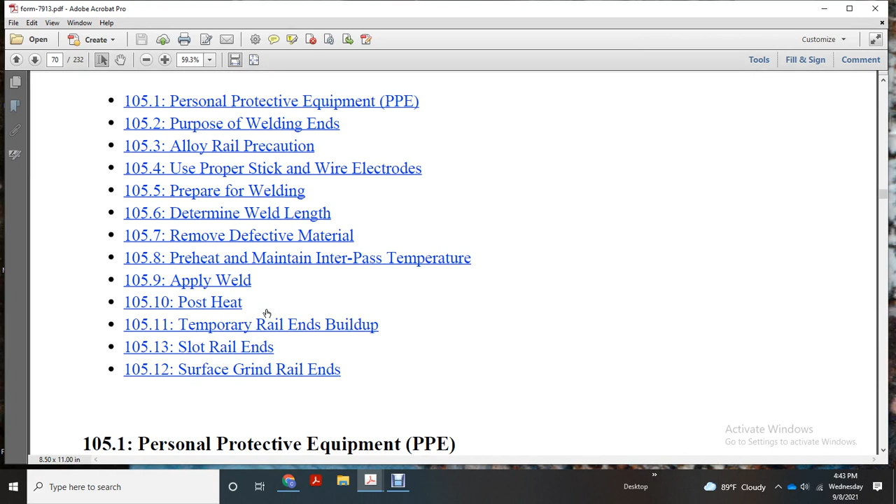105. Welding rail ends. Personal protective equipment. Purpose of welding rail ends. Alloy rail precaution. Use the proper stick and wire electrodes. Prepare for welding. Determining weld length. Remove the defective material. Preheat. Maintain interpass temperature. Apply weld post heat treatment. Temporary rail end build-ups. Slot rail ends and surface grinding.

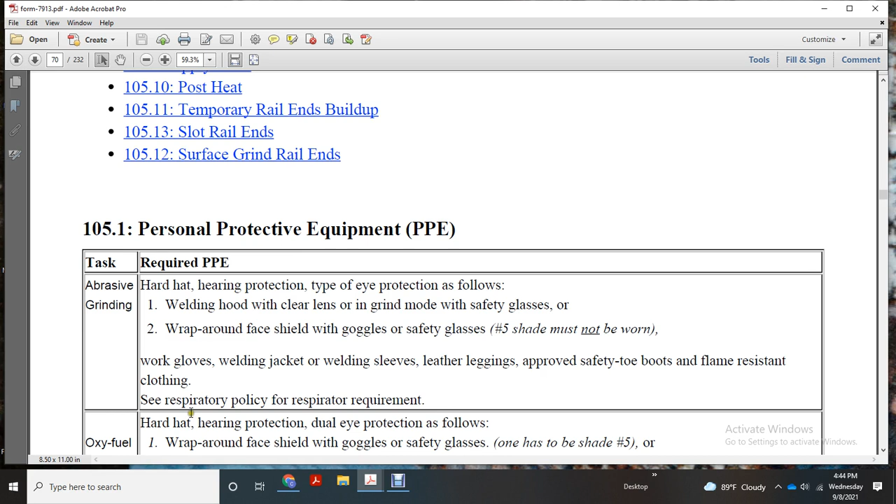approved safety-toe boots, flame resistant clothing, see respiratory policy for respiratory equipment. For oxy-fuel gas: hard hat, hearing protection, dual eye protection, wrap-around face shield with goggles and safety glasses, mono goggles shade 5; safety glasses can be used as an alternative; leather welding gloves, welding jacket, weld sleeves, leather leggings, approved safety boots, and flame resistant clothing.

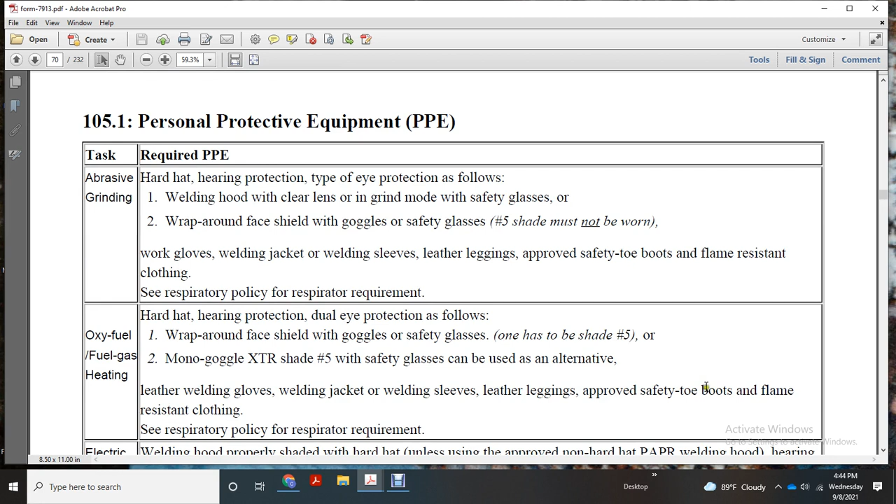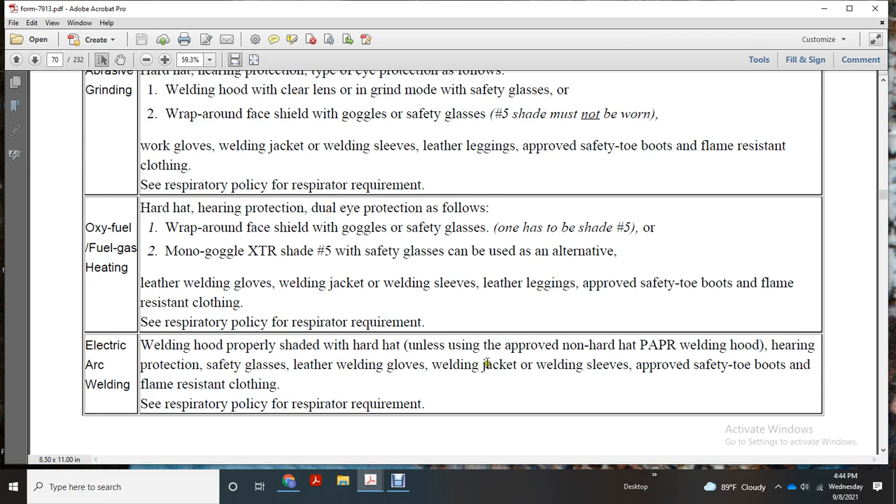See respiratory policy for respirator requirements. Electric arc welding: welding hood properly worn with a hard hat, unless an approved non-hard-hat PAPR weld hood is used, hearing protection, safety glasses, leather welding gloves, welding jacket, welding sleeves, approved safety-toe boots, flame-resistant clothing, see respiratory equipment.

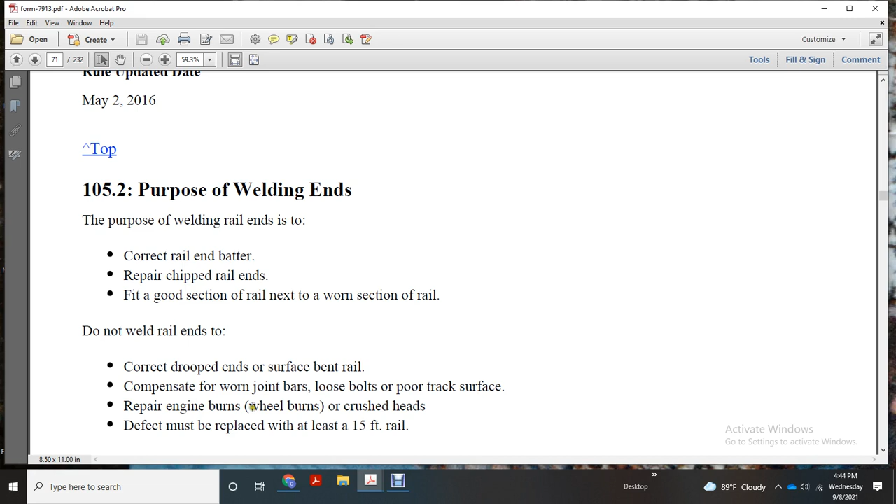Purpose of welding rail ends. The purpose of welding rail ends is to correct rail end batter and repair chipped rail when there is a good section of rail next to the worn section of rail. Do not weld rail ends to correct drooped ends or surface bent rail, worn joint bars, loose bolts, or poor track surface. Repair engine burns, wheel burns, crushed heads. Defects must be replaced with at least 15 feet of rail.

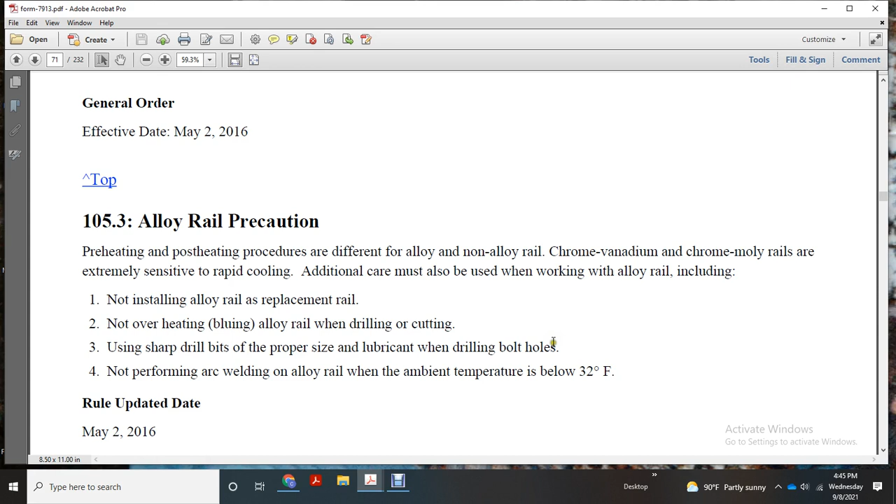Do not weld the gauge face of the rail. Alloy rail precaution: preheating and post-heating procedures differ for alloy and non-alloy rail. Chrome-vanadium and chrome-moly rails are extremely sensitive to rapid cooling. Additional care must be used when working with alloy rail, including not installing alloy rail as a replacement rail, not overheating or bluing the alloy rail when drilling and cutting, using sharp drill bits with proper lubrication when drilling bolt holes, and not performing arc welding on alloy rail with an ambient temperature below 32 degrees Fahrenheit.

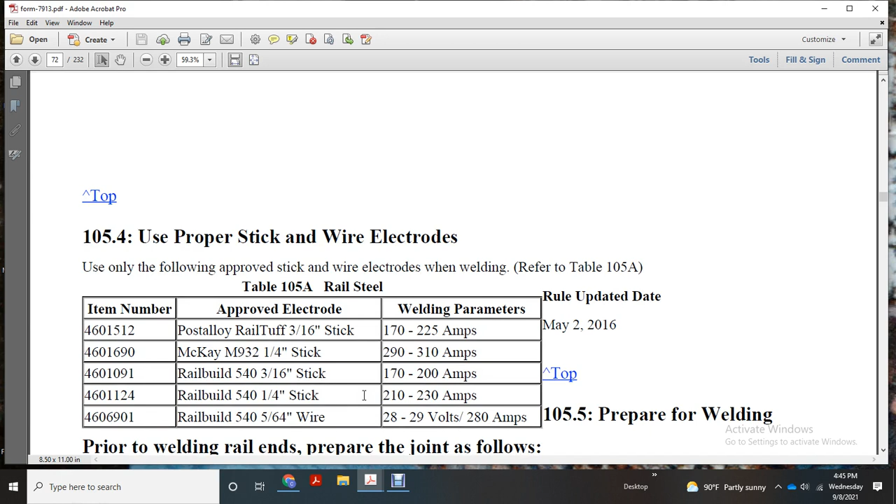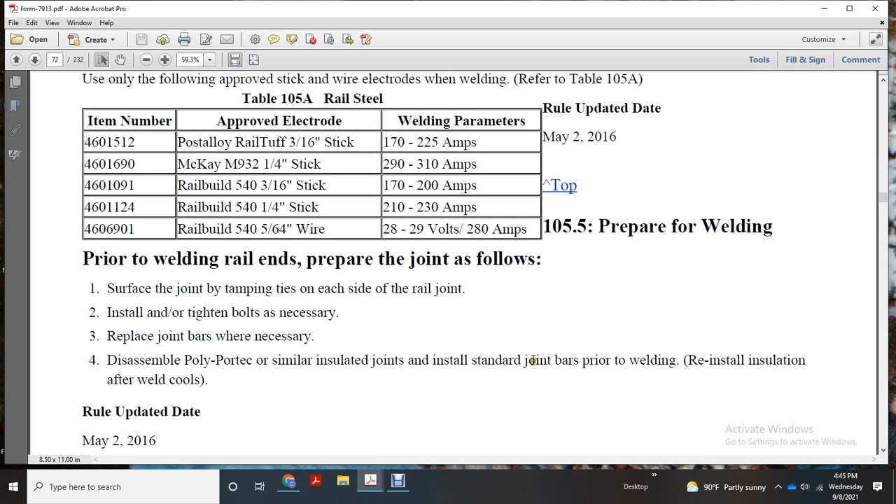Use the proper stick and wire electrodes. Use only approved stick and wire electrodes for welding; the table shows the item numbers of approved electrodes and welding parameters. Prior to welding rail ends, prepare the joint: surface the joint and tamp the ties on each side of the rail joint, install and tighten bolts, and plate the joint as necessary. Replace Poly-Portec or similar insulated joints with standard joint bars prior to welding, and reinstall insulation after the weld cools.

Determine weld length. If the bolted rails are in the same plane and the rail is battered or chipped, follow these instructions: build the rail level, observing the existing rail beyond the batter or chip. Do not end the weld directly over a bolt hole. Do not weld beyond the outermost bolt hole. Check rail end batter with a straight edge independently on each rail; if the rail is damaged beyond the outermost bolt hole, the rail must be replaced.

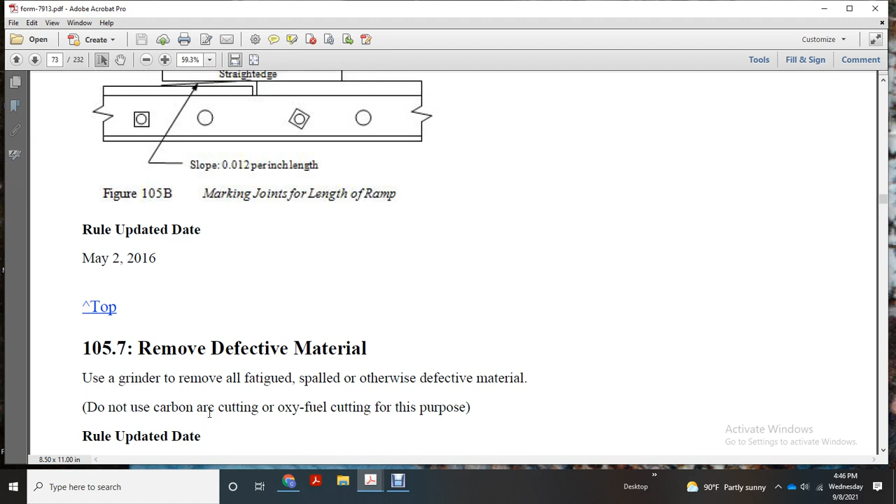Remove the defective material. Use the grinder to remove all fatigue spalling or other defective material. Do not use carbon arc cutting or oxy-fuel cutting for this purpose. Preheat and maintain interpass temperature. Use a Teleweld or other approved rail heater for the recommended preheat and post-heat, with a temp stick or pyrometer to measure the rail temperature during preheating.

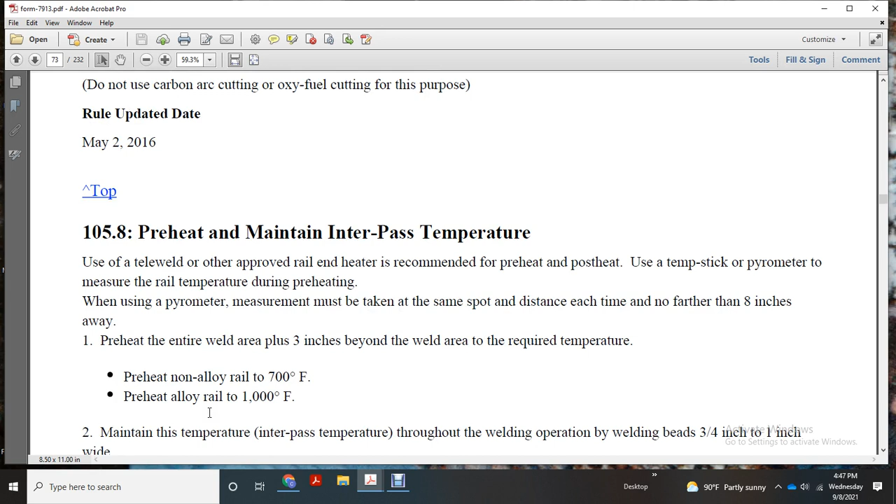When using the pyrometer, the measurement must be taken in the same spot, at the same distance each time, no farther than 8 inches away. Preheat the entire weld area 3 inches beyond the weld area to the required temperature. Preheat non-alloy rail to 700 degrees Fahrenheit. Preheat alloy rail to 1000 degrees Fahrenheit.

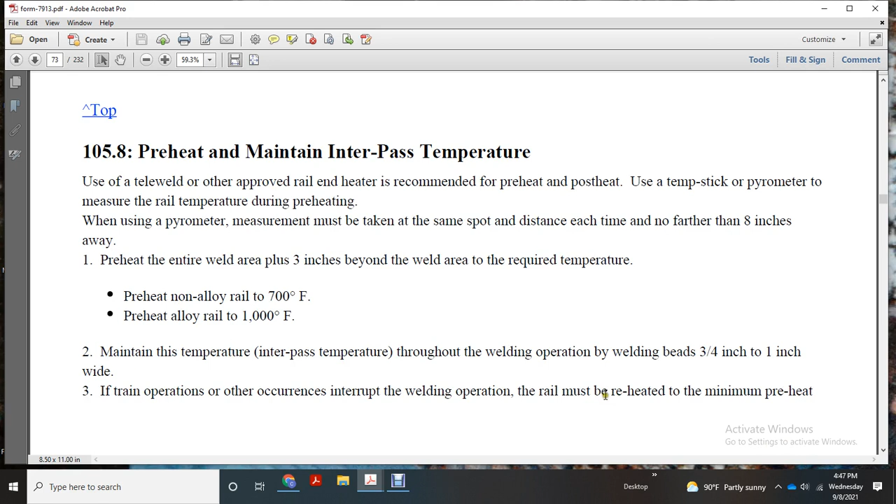Maintain the interpass temperature throughout the welding operation. Weld beads 3/4 inch to 1 inch wide. If trains or operational concerns interrupt the welding operation, the rail must be reheated to the preheat temperatures before welding continues.

Applying the weld. Apply the ground clamp at the rail anchor. Do not allow the ground clamp to make contact with any part of the rail or the joint bar, which may leave an electrical arc or result in fracture. Make the weld beads 3/4 inch to 1 inch wide. Weld bead length may be as long as the repair area. If necessary, overlap weld beads 30 to 40%.

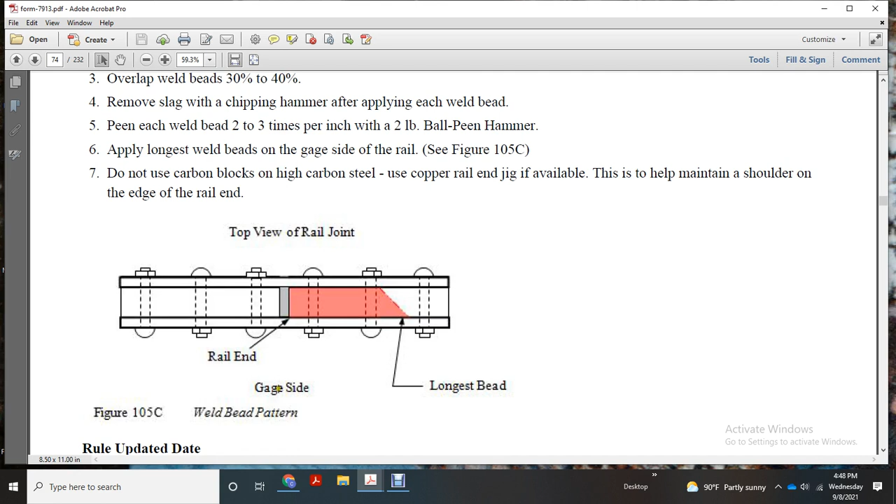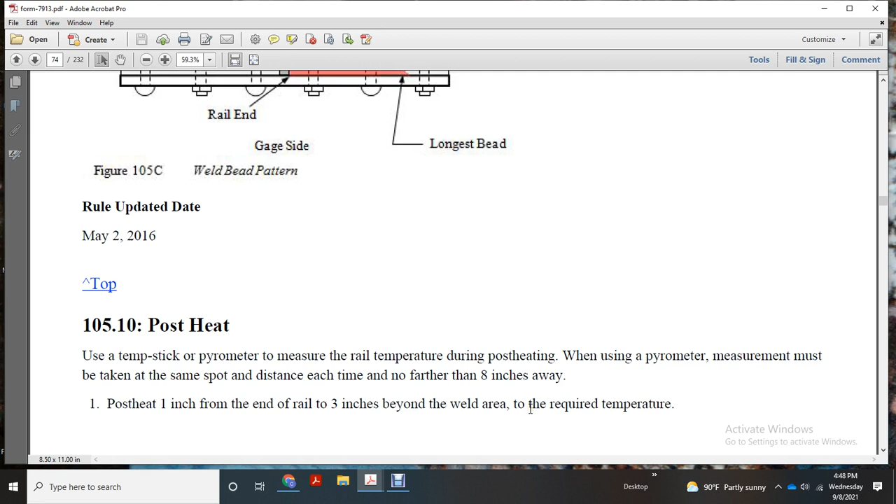Post heat. Use a temp stick or pyrometer to measure the rail temperature for post heating. The pyrometer measurement must be taken on the same spot, at the same distance each time, no further than 8 inches away. Post heat 1 inch from the end of the rail to 3 inches beyond the weld area, to the required temperature. Post heat non-alloy rail to 1000 degrees Fahrenheit. Post heat alloy rail to 1200 degrees Fahrenheit.

Temporary rail end buildup. Temporary rail end buildup is used to prevent batter where there is rail mismatch and to comply with the FRA tread mismatch requirement during curve rail and switch component replacement. See Figure 105D. Rail preparation.

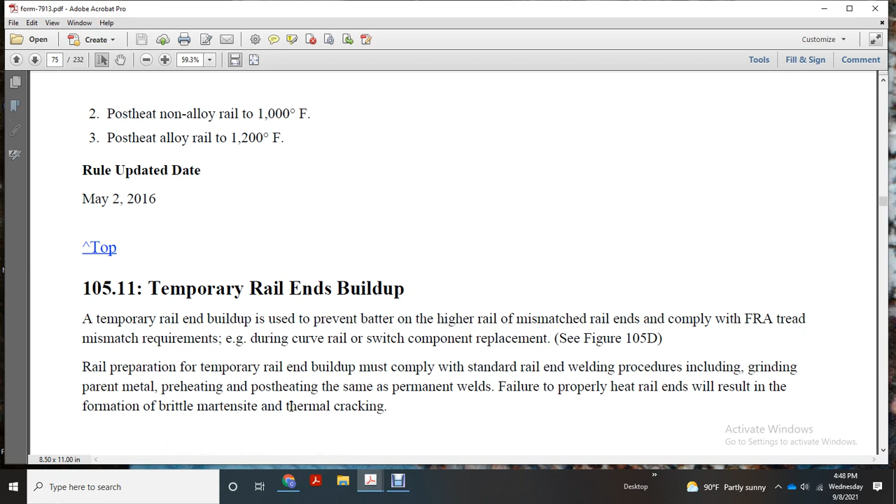Temporary rail end buildup must comply with the standard rail welding procedures, including grinding parent metal, preheating, and post-heating, same as permanent welds. Failure to properly heat rail ends will result in the formation of brittle martensite and thermal cracking. Temporary buildup rail ends are not intended to be permanent and should be removed at the first opportunity.

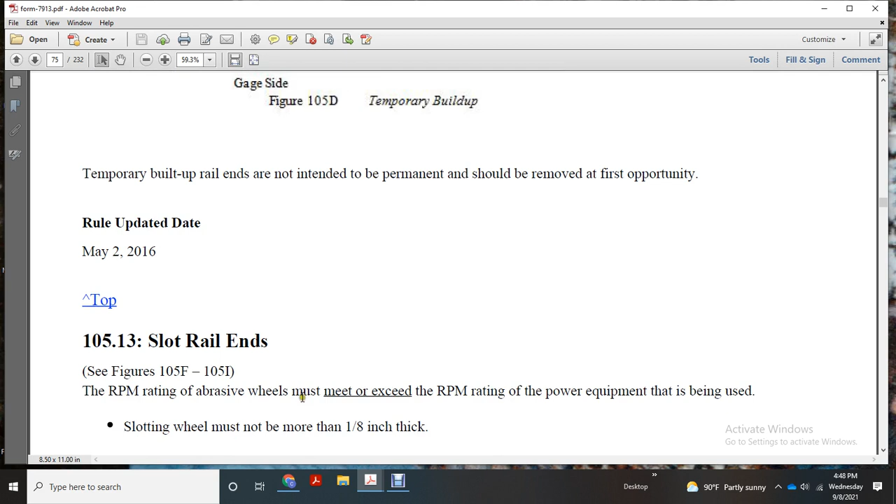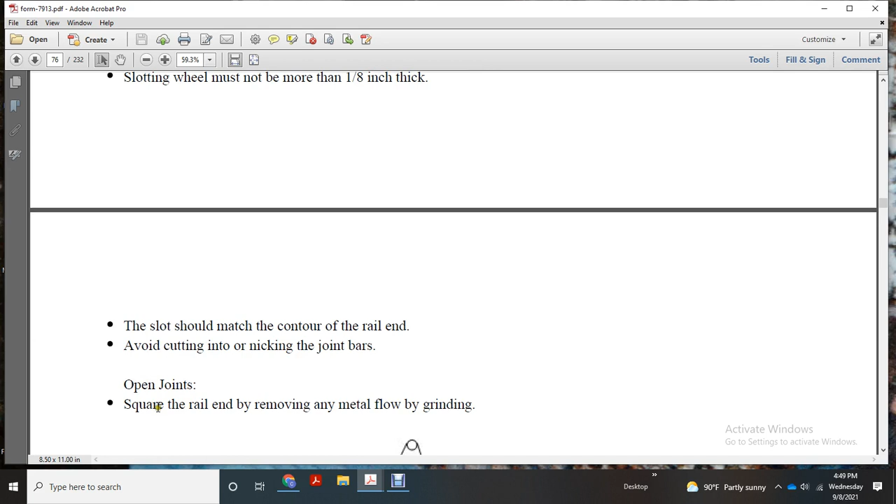Slot rail ends. The RPM rating of the abrasive wheel must meet or exceed the RPM rating of the power equipment being used. The slotting wheel must not be more than 1/8 of an inch thick. The slot should match the contour of the rail end. Avoid cutting into or nicking the joint bars. Open joint: square the rail end. Remove the flowed metal by grinding. Slot rail ends to the required dimension. Slot the rail ends 1/4 inch to 5/16 of an inch deep. Bevel the rail ends 1/16 of an inch to 3/32 of an inch deep.

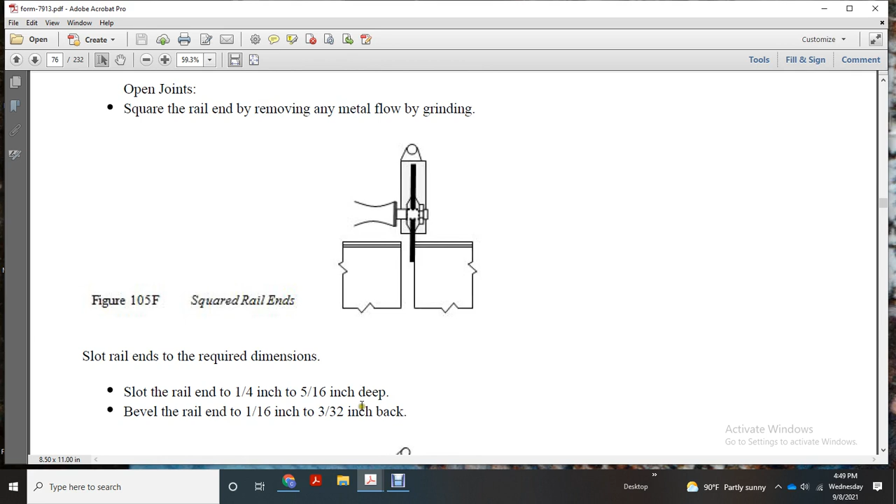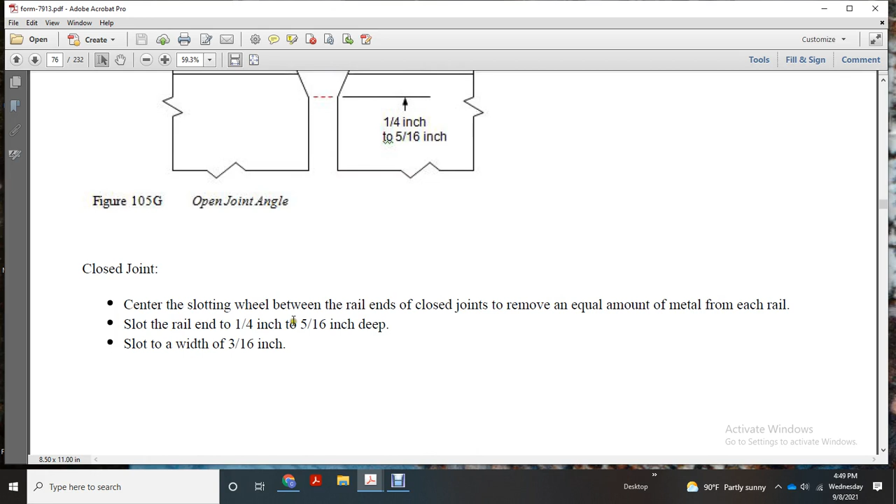Closed joint: center the slotting wheel between the rail ends of closed joints to remove an equal amount of metal from each rail. Slot the rail ends 1/4 inch to 5/16 of an inch deep with a slot width of 3/16 of an inch, as shown for the closed joint.

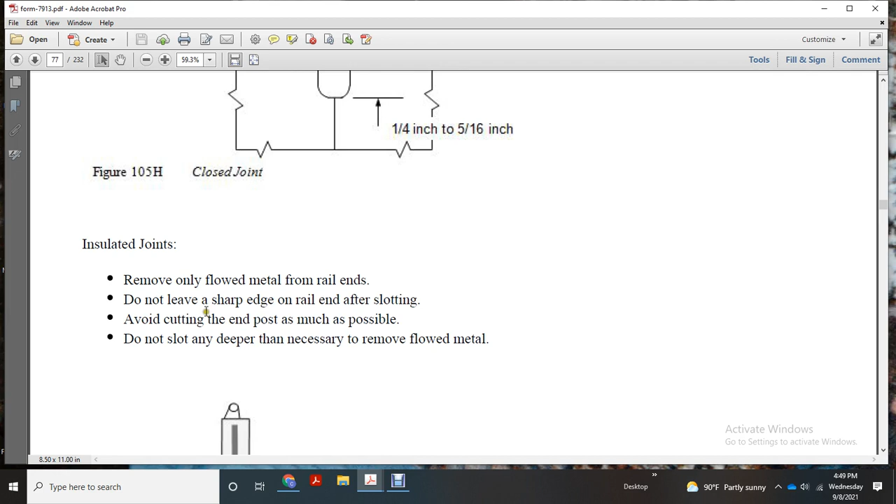Insulated joints. Remove only flowed metal from the rail ends. Do not leave a sharp edge on the rail end after slotting. Avoid cutting the end post as much as possible. Do not slot any deeper than necessary. Remove the flowed metal.

Alright, so for grinding rail ends. Grind gauge and field of the rail ends to match the existing profile. Remove the overflow and grind the surface of the rail ends. Level tolerance is 0.000 of an inch to as high as 0.010 of an inch. If one rail is lower than the other after welding, grind a uniform taper over the end of the high rail at the end of the weld to meet the low rail.

If the bond wires are damaged, notify the signal maintainer or signal operator hotline. Remove the rail bonds and grind only. 106, welding switch points.